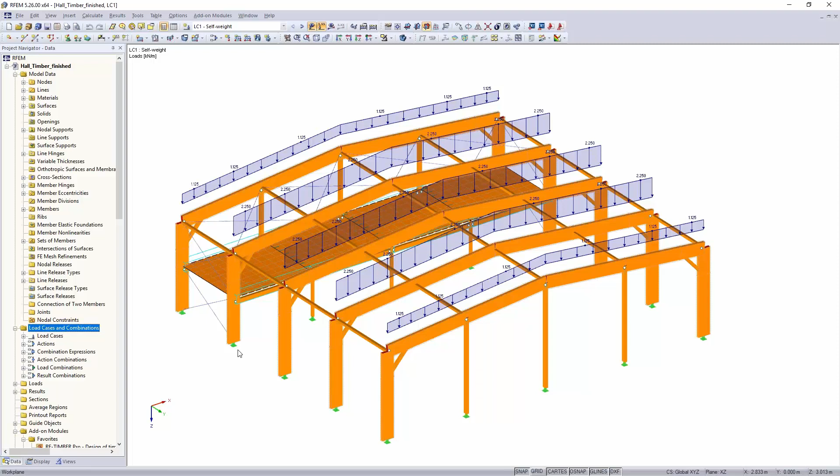Another question last week was what you can do in case you have a rafter with a roof overhang, a cantilever, and how to regard that, as Andreas modeled the creeping according to serviceability limit state with a creeping factor for service class 1. In such a case you would have a rafter with service class 2 on the outside and service class 1 on the inside.

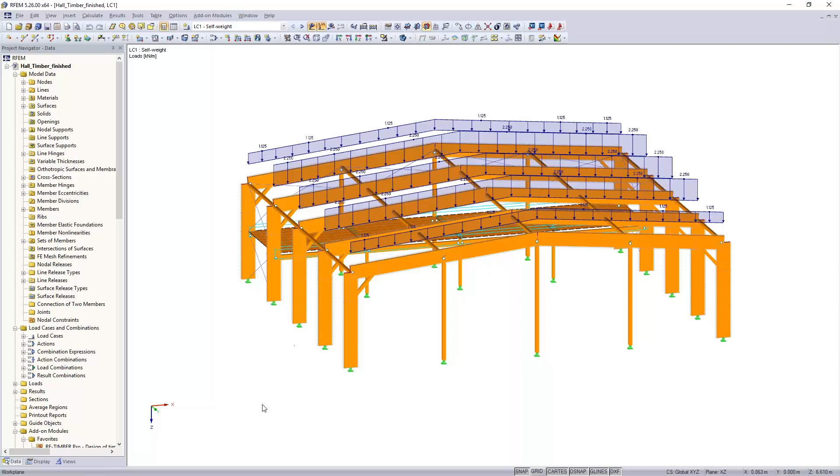I want to give you a short example of what you could do in such a case. On this truss, I will not add a cantilever, but I will show you what you can do in a highly nonlinear system. Therefore I would just focus on the beam or the truss in the middle.

So let's have a look at this, and I will take a look at the serviceability limit state in load combination 117. You can see that in order to regard the creeping, the software increased the load by a factor of 1.6. Andreas mentioned that all last week.

Now, how could you do that in case this was a highly nonlinear system? Because then increasing the load would not regard creeping correctly. That would work via copying this and reducing the stiffness. That's just one way how you could do it.

In general data, I will now switch off the automatic load combination, and I want to keep the current load combinations. Say OK, and now I can go in here and select load combination 117. Copy this load combination, and I will call it nonlinear.

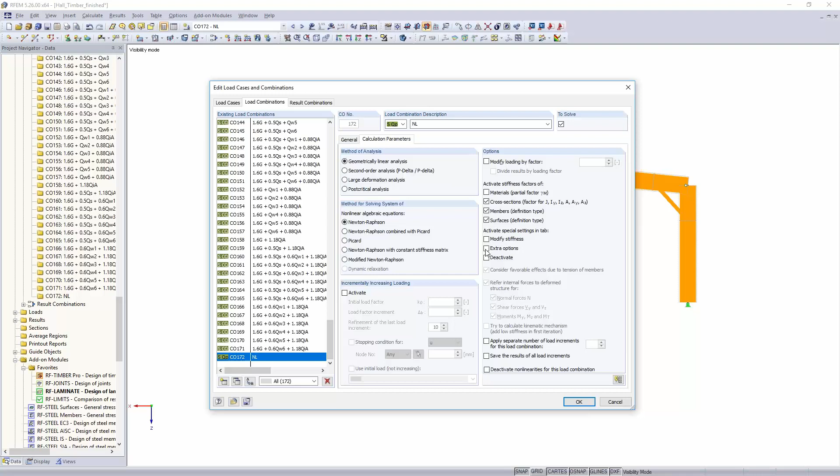Okay, and here I have the copied one. Go edit there, and first I have to reduce the increasing, so just keep it at the characteristic level. Then in calculation parameters — we're going to need these options later on also for ultimate limit state.

There's a check for modify stiffness, and if you activate that, you can reduce or increase the stiffness of hinges, materials, supports, for nearly everything that you have in the structure. For our case here, we will reduce it with the vice versa value of 1.6, so that's 0.625 for every stiffness.

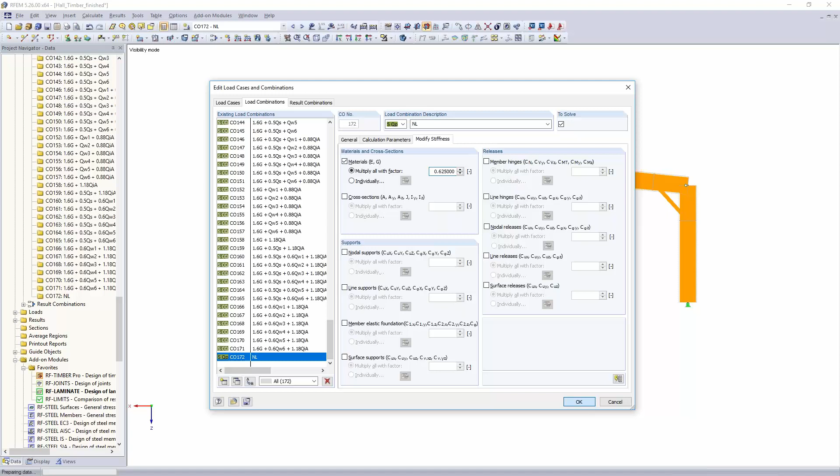Press OK, and now when we look at the load combinations, we want to see both. So at load combination 117, you see that you have a deformation of about 40.7 millimeters with the increased load, so with a factor of 1.6.

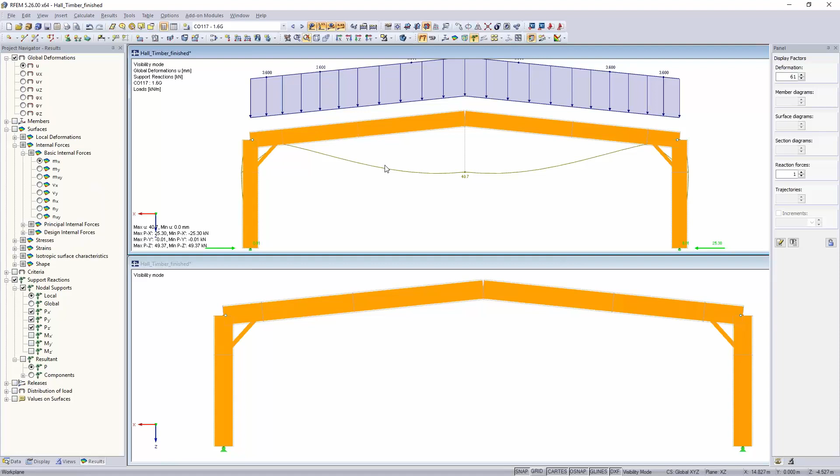So with this increased load, in this nonlinear combination we have the original characteristic value, and if we look for the deformation there, as this is now a linear system, you can really compare that very easily, and you see you have the same deformation just because we reduced the stiffness.

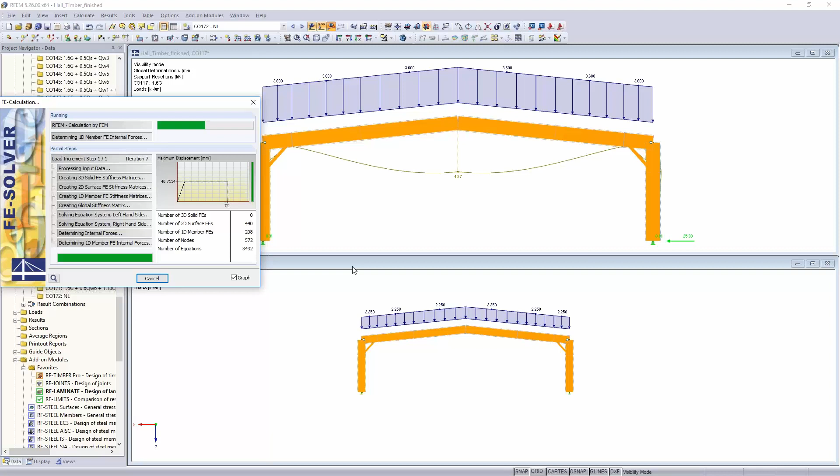This is a way how you could do that, in my opinion pretty easy, also for the case where you have cantilevers outside, because then the timber material on the outside you could reduce with the factor of 1.8, which is for service class 2, and on the inside you use 1.6. So it's just one way to do it. There are more options, but this is what I would recommend.

This was just due to the questions that we had last week, and as they were coming pretty often, I think it's worth showing to everyone.

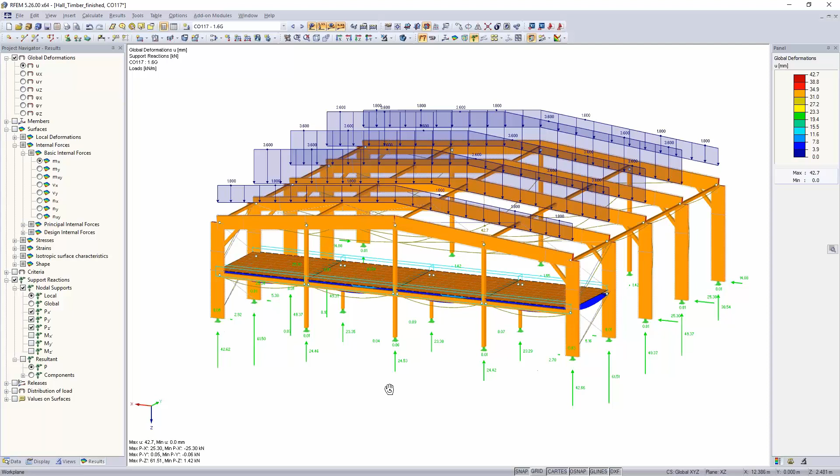Now we go into designing. Andreas already modeled here a CLT plate just for generating the stiffness that we would need for the design later on. But what he did not do, and what makes absolutely sense when you model the structure not to do, was to also generate the stiffness for the line hinges and the releases.

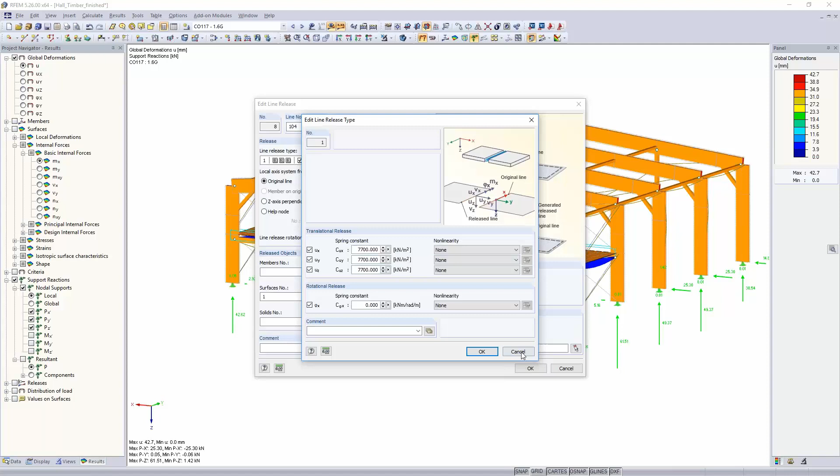So he generally introduced this stiffness here, but for the ultimate limit state you have to reduce this by a factor of 2 divided by 3, the slip modulus. For everybody who wants to know where it is written, it's in equation 2.1 in Eurocode 5, and you can do it similar to what I did before with the serviceability limit state.

Just go into edit load combinations here, and then you check on the ultimate limit state, every combination of the ultimate limit state, calculation parameters, and again switch on modify stiffness. In modify stiffness you say the line hinge and the line release we now also reduce by this factor according to equation 2.1 in Eurocode 5.

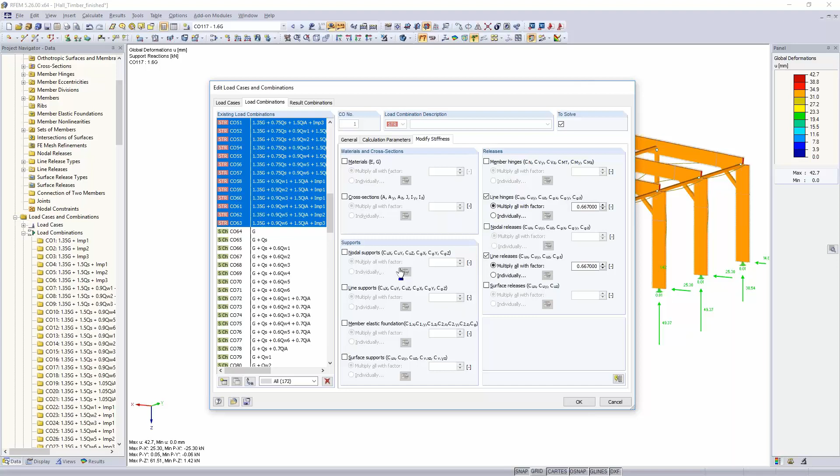So then this is done, and for SLS we are designing on characteristic level. Yes, that's what we want. So now you have generated the stiffness differently for SLS and ULS design, and then you can go to the add-on module laminate, which Andreas already showed you last week.

He used just the result combination here for the design. Usually, for the ultimate limit state in laminate, you should use load combinations because it's generating stiffness and it just makes more sense.

But of course this will take a long time, so for any design add-on I'm presenting today, I already calculated the design-giving combination and will just use that to keep the calculation time shorter and not spend hours watching the screen calculating. I think that's not so interesting for you. You all surely know that we can generate combinations and calculate them in not too long a time, but for the webinar we want to reduce it further.

So I found out that load combination 48 will be the relevant combination for me. For serviceability limit state, I will do that similarly. For the characteristic combination, I calculated combination 104, and I assigned it as characteristic. I will get to that point directly.

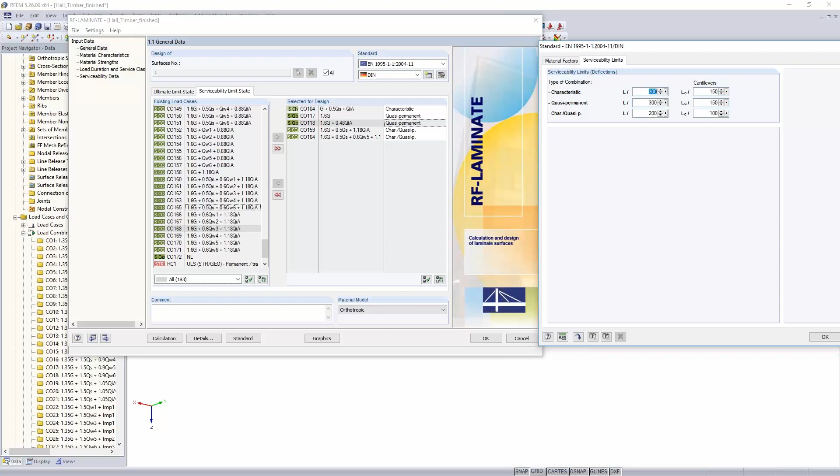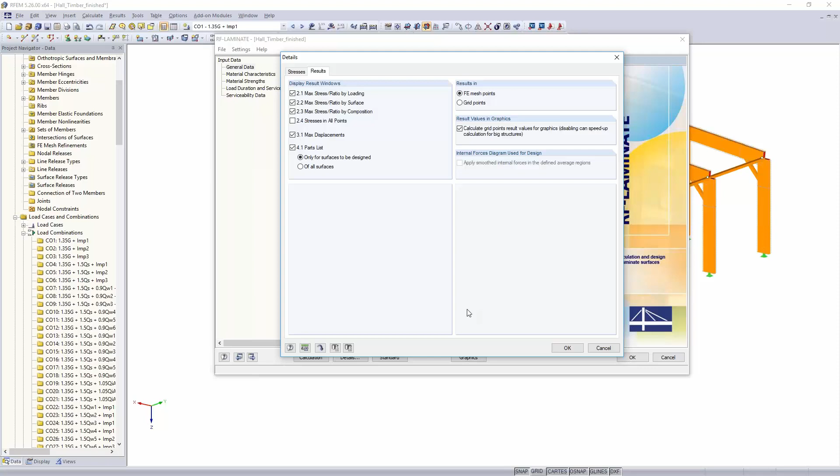Okay, the rest was well explained already. Let's say a small word on the detail dialog. The stresses verified in this add-on are predefined according to the German annex of Eurocode 5. In case you have a wall that you want to design, there are more checks you should activate, for wall loading behavior, but that's something more special. In the structure we are designing here today, we just have a plate or loaded plate in this case. Okay, material characteristics.

Andreas chose a plate from the producer KLH. Just to introduce all the other producers once again, we also have producers like Södra, Steiko, and so on. We try to keep the producer database current, but it makes sense to double check with the producer just in case they changed some setups or factors. In general, we try to implement every producer according to technical approval from the producer.

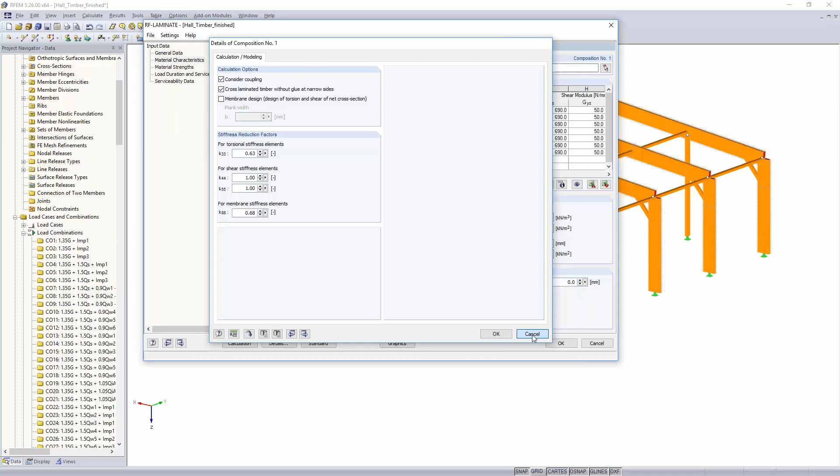Okay, so we choose the KLH. I'm not going to change that today. Here, edit details was also shown. KLH uses timber without glue at narrow sides, at least for the stiffness. That's what I said, in case you have a wall loading behavior, you should activate the membrane design here. All the factors are predefined according to technical approval, and this generates this stiffness here. Also the strength, it counts the same there as well. And load duration and service class is also assigned.

Once again, in case you have a rafter with a cantilever, also for the strengths, you must choose a different service class. That can be done quite easily here. We are completely in service class 1, but for the strengths you could choose different surfaces with different moisture class, that's no problem.

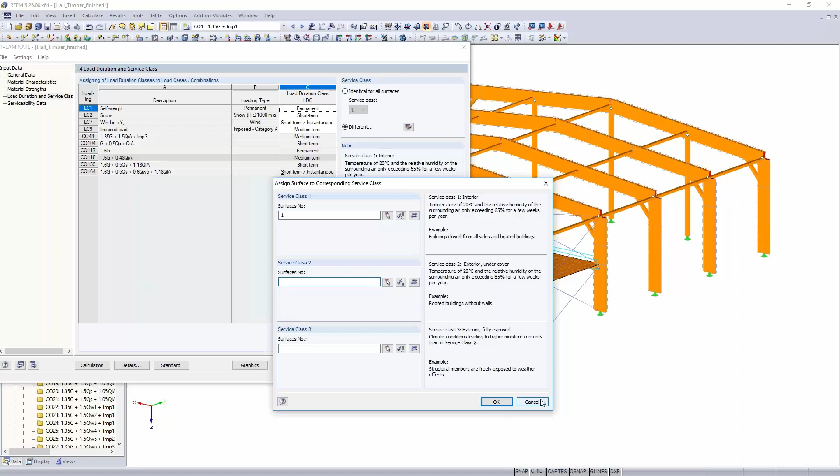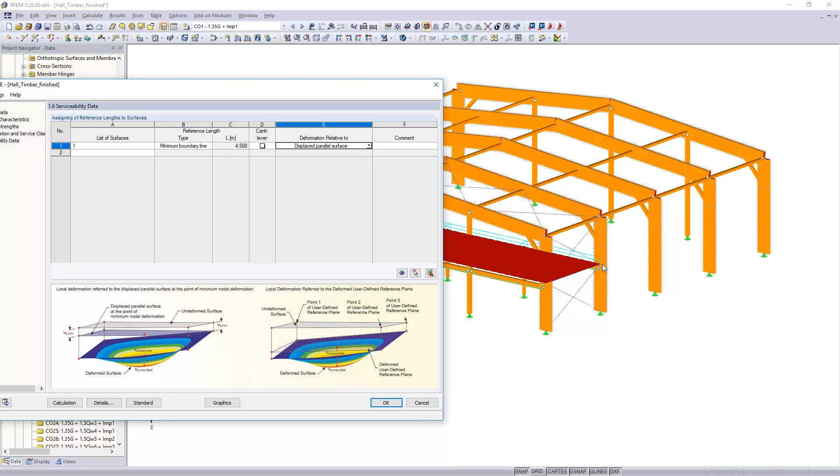All right, and then serviceability limit data. We just have this one surface here, and we want to verify it to the shorter length, from this point to this point, 4 meters 50 centimeters. We assign it to a displaced parallel surface. I hope these pictures describe it well. Undeformed is just the undeformed system, and displaced parallel surface means the whole structure can deform, and we only verify the deformation from one node to the other.

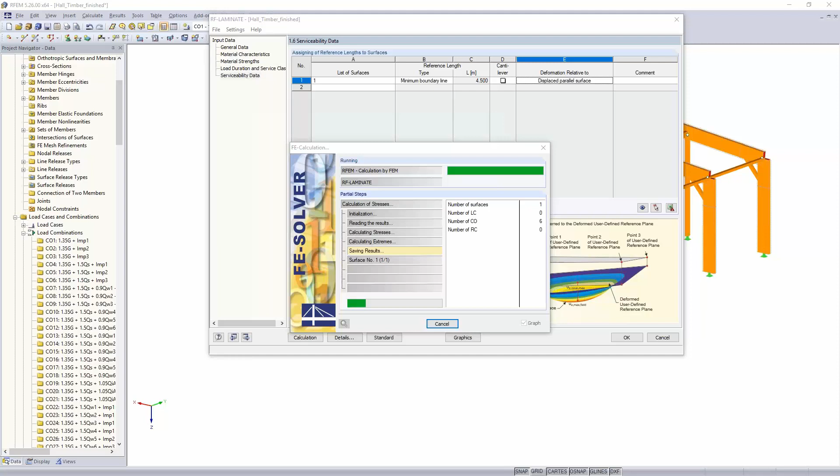All right, then we calculate it. That gives me the chance to look if there were any problems. Some audio was gone but it was just one person, so I hope that's okay. So for the stress design, we have now a ratio of 42% loading, and it is tension compression, which in this case comes also from bending and tension compression on the outer sides.

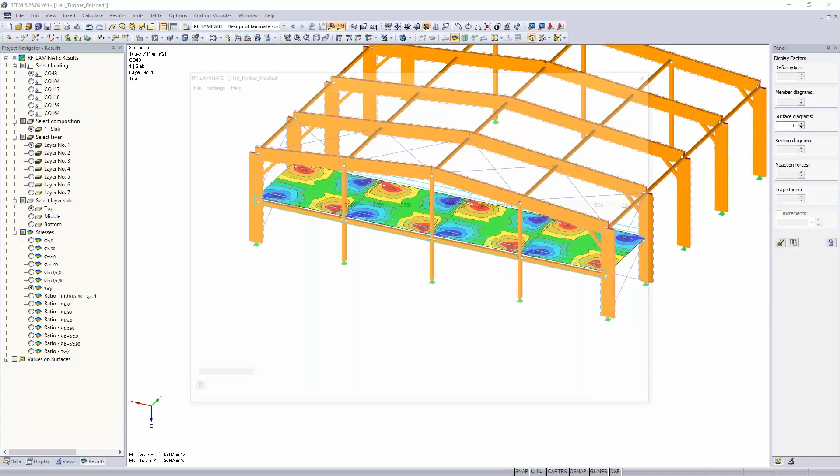If you go to the graphics, maybe we can switch off the rendering, yeah that helps. You see you have pretty high loading where the support in the middle is, and there are probably also shear problems on the edges of the surface, which makes sense. So 42% is not loaded that much here, but you also have to look at the deformation of the structure, and this is verified here. If you look here, for tension, for deformation, the loading is even higher, so we have a loading of 75%

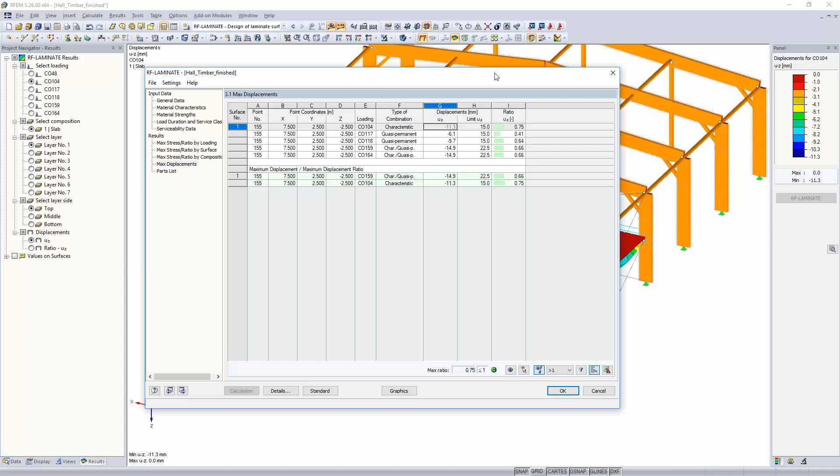in this case in the characteristic situation. And you should also not forget, maybe you would need deflection analysis as well, just in case this is required. Okay, so at all the design for the beam, or for the panel, is done here, and we could go to the design of the members.

Maybe one thing I forgot, it makes sometimes sense to get one of these pictures, for example, into the printout report. You can do that here directly in this column. Maybe when we get a nice shear, this one is probably something you would also want to add to the printout report as well, and maybe something outside the graphics. Yeah, this one, for example.

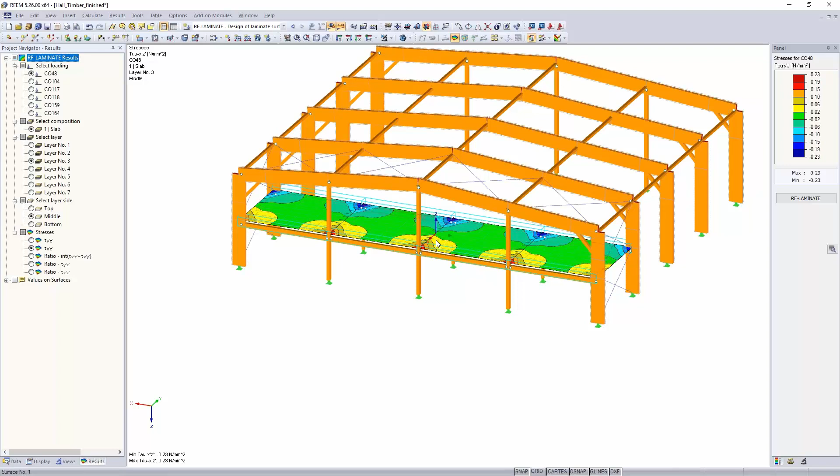So the design of the plate is done with this, but the connection on the edges of the plate and also on the outside of the plate needs to be done, and therefore we will just grab combination 48 in ultimate limit state.

48, there it is. And here in the results, down below, you have the option 'releases', and there you can see what normal force you have in the line hinge. Okay, that's not so interesting here, I think.

But for the plate lying on top of the beam, it's probably relevant, because this is the shear that's in between the plate and the member, and that's what you really need to connect. You see that there the value is not that low, and that's something you probably need to verify. So this gives you a good graphical overview.

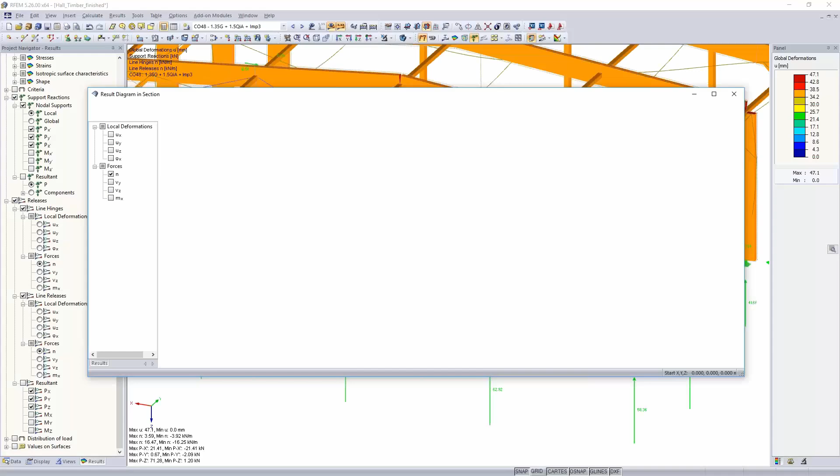Okay, so once you've done this, all the design of the plate with its connections is done. So you could say check to this, and now we go to the members. Therefore we will start the add-on Timber Pro.

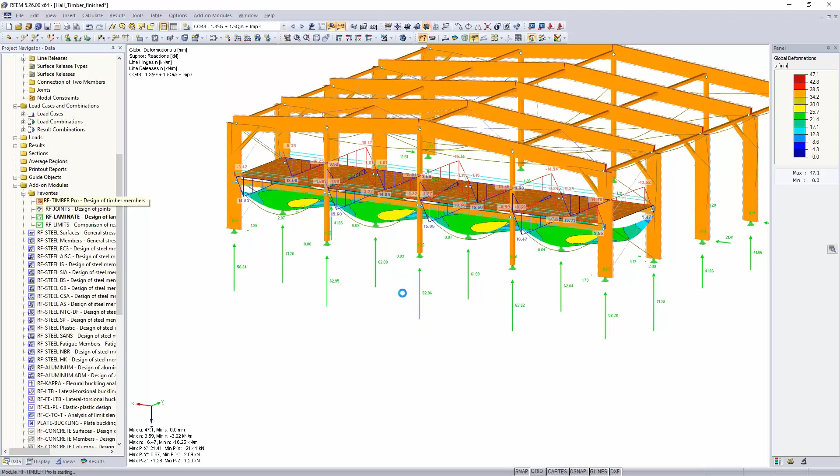And in here we have members and set of members. Set of members in our constellation here are important for the serviceability limit state. So for the deflection, I will only verify the set of members in the middle, so set of member 9 and set of member 6.

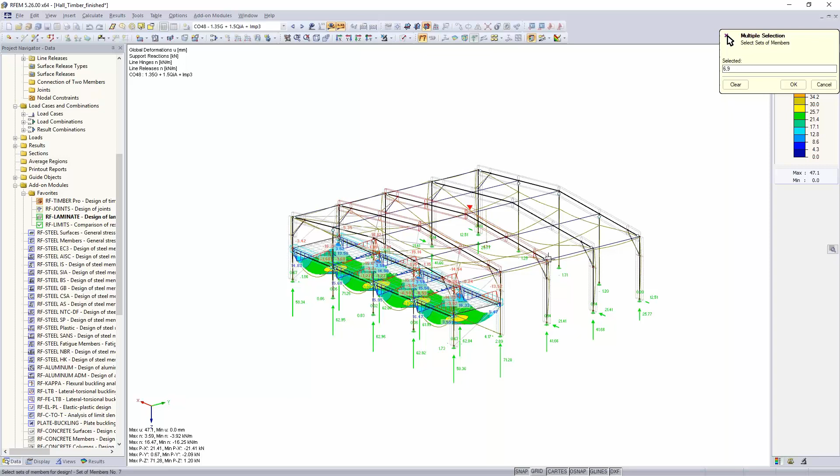Set of member is also important for stability, but in what we are doing here today, we are taking the deformation from the point where you see the mouse here and the mouse there, so we take the whole length and verify the deformation on this part. That's what we do here.

Once again, I will not verify the complete result combination, as this would be too time consuming for the webinar, and I will use combination 38 and 44 just to have two, and I will do the same for serviceability limit state with combination 72.

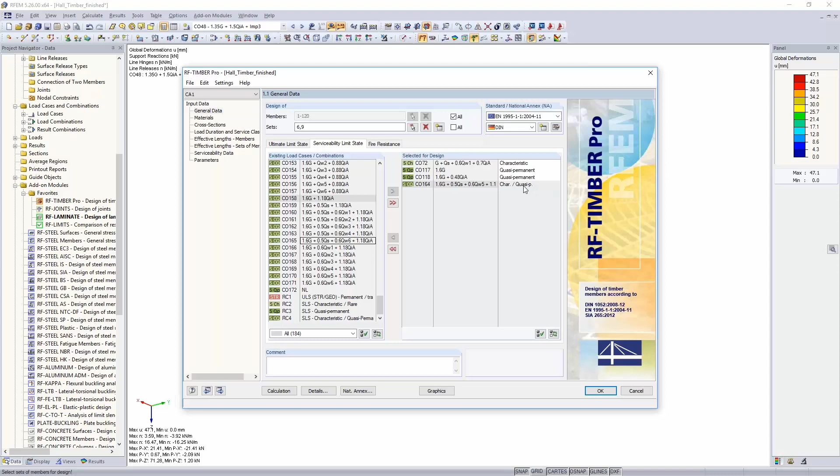For the characteristic level, once again, for quasi-permanent and characteristic, I can choose both, as there are only 2 generated, and for the characteristic quasi-permanent, this one now, I will use combination 164. Okay, once again, it's similar to what we had in the laminate add-on.

It's automatically designed. If you want to do a simplified vibration design, you could do that here as well. But for the members, I don't see that too problematic here. Maybe for the CLT, as I said, that would be something I would maybe do or add, but we're not going to do that today.

Fire resistance is possible with Timber Pro. It is also possible with the laminate add-on, but it requires more effort. Maybe Gerhard or I will send you an FAQ where we answer that. So it's possible, but in laminate, as laminate generates stiffness, it is just more effort to do.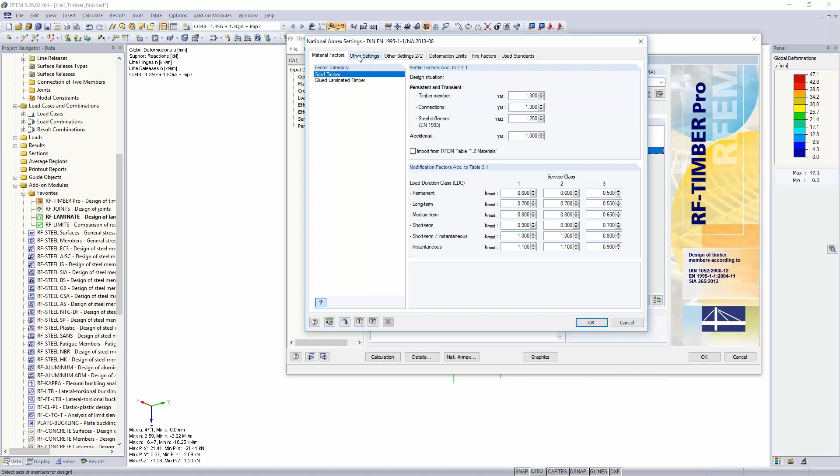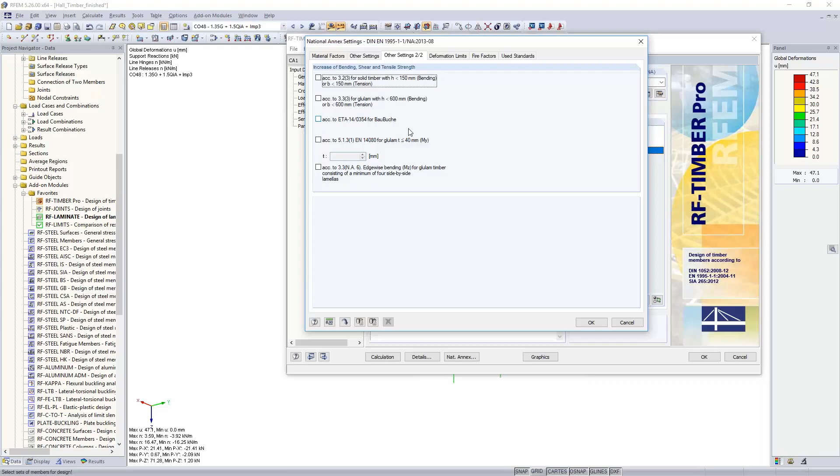Nevertheless, it makes sense to take a look at the detail dialog of the National Annex, because you not only can define deformation limits, but you can also add all the other factors, for example for K-crack, for shear verification. If, for example, you want to calculate LVL from the producer Baubuche and so on, you could also activate that here in the detail dialog.

The rest is not so important. Load duration, service class, it's the same dialog as what we had in the laminate add-on. One thing I forgot when we started, in this case we defined imperfections and calculated the ultimate limit state according to second order theory. Therefore buckling does not need to be verified, and lateral torsional buckling—I have a pretty stiff sheeting and I will verify that separately, so I can switch off the whole check for stability.

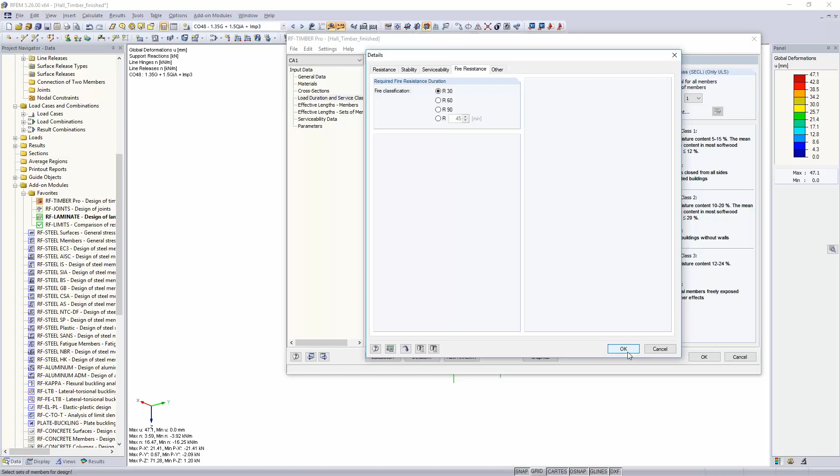Serviceability, that's the same as what we had in laminate, with deformed and undeformed system; fire resistance we do not do here. Okay, that's this. Serviceability data, okay, we say set of members—I remembered what we did there: member 6 and member 9, the ones in the middle, and I'm using the full length.

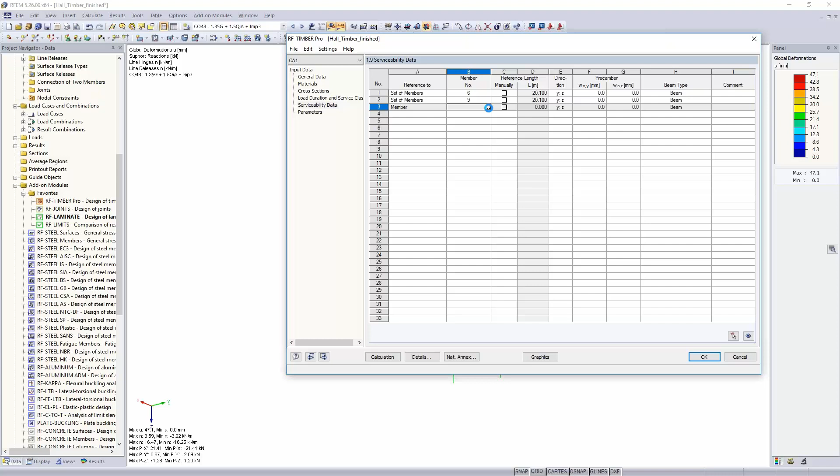And maybe also the members underneath the CLT should be verified for deformations. I will now only take the one here inside. Maybe I just don't care about the ones on the outside, and verify them. All right.

Parameters is shear force reduction and also cutouts, which we do not have in this situation. So we could start the deformation calculation of all the combinations that we assigned.

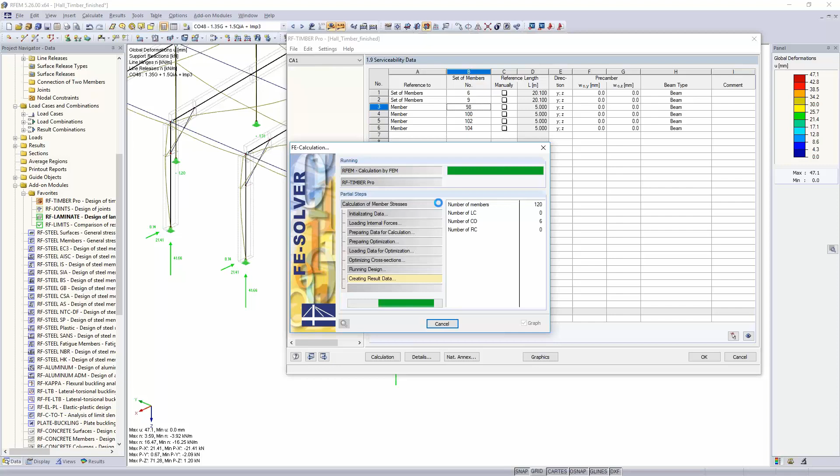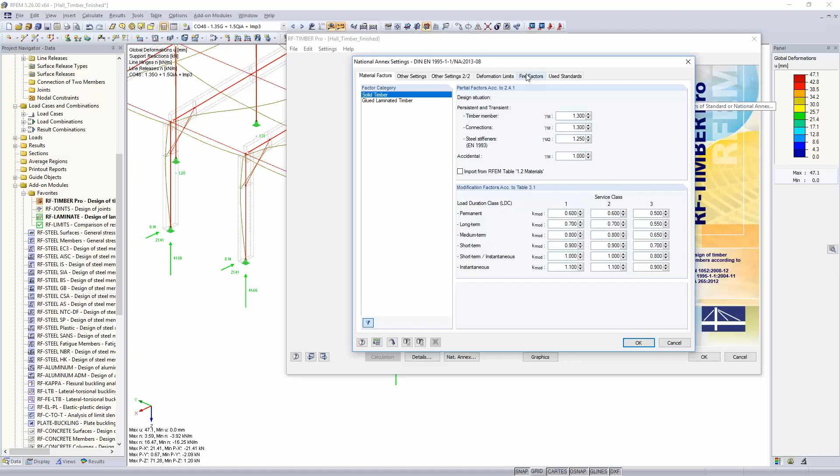There was a question about fire resistance, so let me quickly introduce that a bit more. I will not verify it today, but just to keep you informed: in order to verify fire resistance, you must create an extraordinary combination in load cases and combinations. Then we reduce the section, all the sections inside, with the so-called burning rate. According to this burning rate, we do all the verifications for the ultimate limit state again with the reduced section. In general it's not so fancy to show, as it is actually the same as what we have here in ultimate limit state. Hope that explains it.

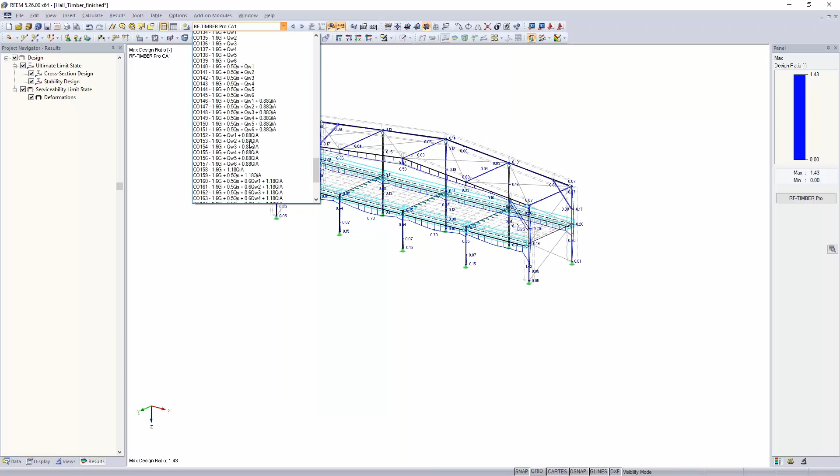Maybe we look for the combination 38, where we calculated that. And then the inner forces there and the torsional moment, which is the critical point here. In members, torsional moment, and maybe we switch off the releases. So you see that we have here a torsional moment of nearly 4 kilonewton meter on the edges.

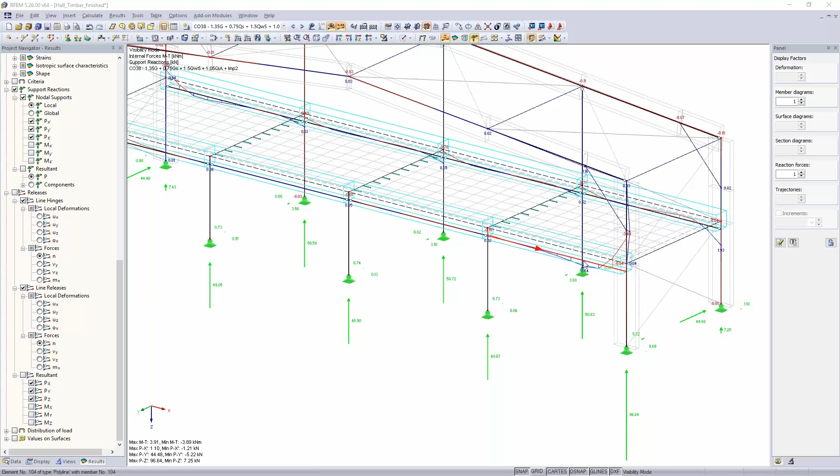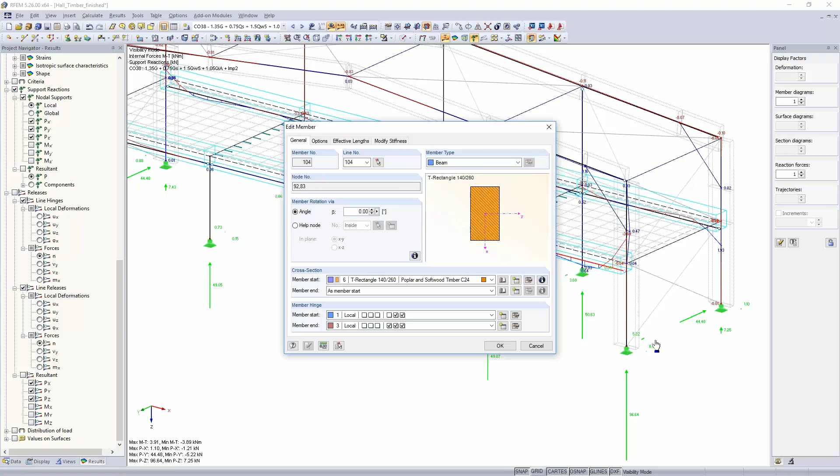It's clear we forgot to put the degree of freedom here. It's only the degree of freedom for the moment in Y and Z direction, but not for torsion. So the phi x on these edges needs to also be given the degree of freedom of 0, which is always the case in timber design. Yes, that requires that I delete the results, because a moment of 4 kilonewton meter you would never, or hardly can, be transferred with any kind of connection type that we have there.

And we will do actually the same here on the start - member start, this one as well, so the same hinge there. Now when we calculate combination 38 again and look for the torsional moments that we have now, you see that we really decreased the torsional moment by a high amount.

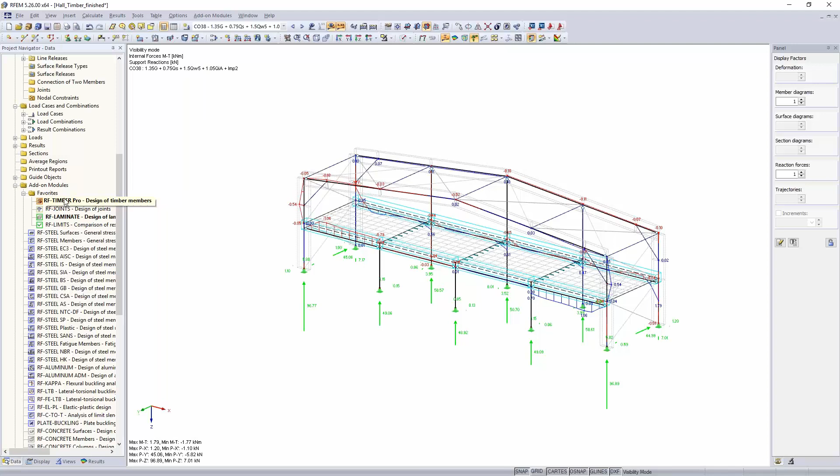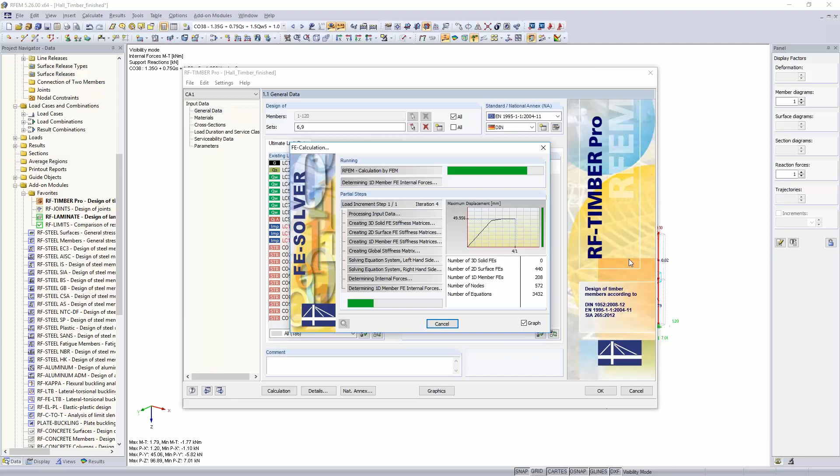Now when we go back to the design in the add-on, we keep the serviceability limit state. It maybe doesn't make so much sense here, as we saw that serviceability limit state was not really a problem, but maybe we want to see the deformation in the longer set of member. I want to show you also the graphical presentation of that. Now you see we do not have any problem from the ultimate limit state, and the design-giving case is now serviceability. All verifications are listed here, and you can recalculate everything that's done by the add-on.

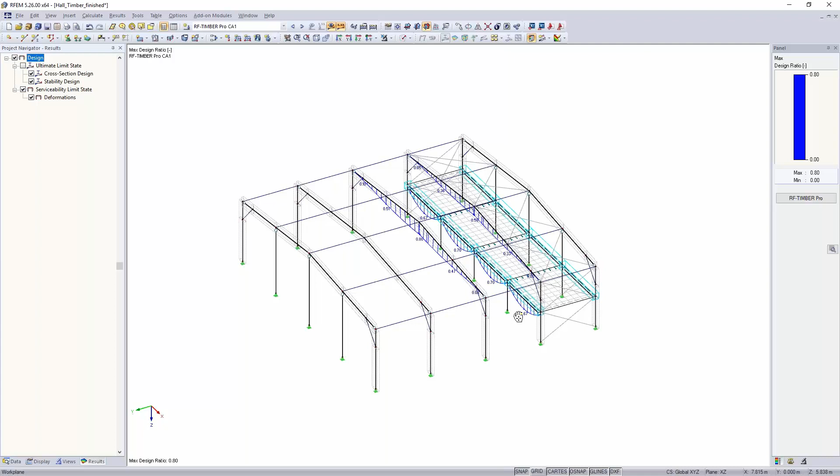If we go switch to graphics and to the whole structure, we switch off ULS, and you see that the longer beam in the middle was actually, as I expected, design-giving with a loading of 80%. The smaller ones are also loaded pretty high, the beams that are underneath the CLT plate.

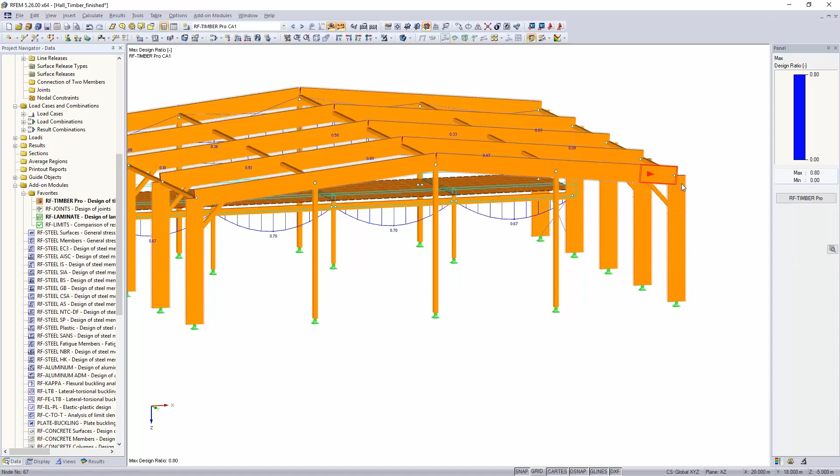That would be the design of the structure, and we can now calculate the connections. I want to concentrate on the connections here at the outer edge of the hall, and also, if we have time left, the connections between the column here and the beam that's spanning from this point to this point. But first I want to design the edges, so I will start the add-on RF-JOINTS.

So that's a little bit different to what I showed you in the Timber Pro and Laminate add-ons, because in this add-on we have the possibility to design steel and timber. These are all different add-ons. So we are concentrating today on timber, and in this add-on you can still separate between steel-to-timber connection and timber-to-timber connection.

Steel-to-timber connection is every indirect connection where you have a steel plate slotted into your structure, and timber connection is a connection between main and secondary truss or load bearing. So we will concentrate for this corner here on steel-to-timber connection.

You can calculate dowels, bolts, nails, and screws. We will design dowels. You have the option to design different joint types. Our joint type will be without continuous member, because we will just have two members connected here. You can choose the cutting main area and how they are connected. You can also choose the standards with all the national annexes.

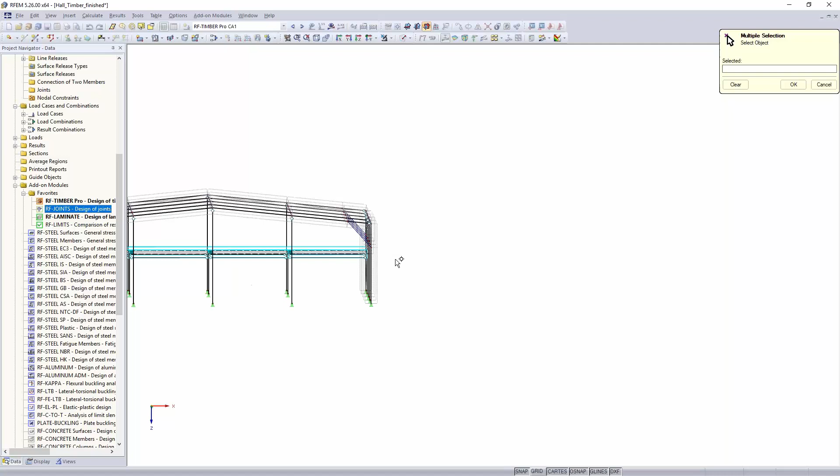You can check the contact of the members and also calculate groups of dowels. All right, then we go into the structure, and therefore we will select - let me switch off the rendering again and also the results. And so we will calculate all the corners here with one check, and also the ones from the other side.

All right, so now I get a lot of alerts, which is clear because we have invalid members, because steel rods cannot be designed with a steel plate, and also the secondary beams here do not make too much sense. So we will just keep the connected member and the main member, and set all the other members as inactive.

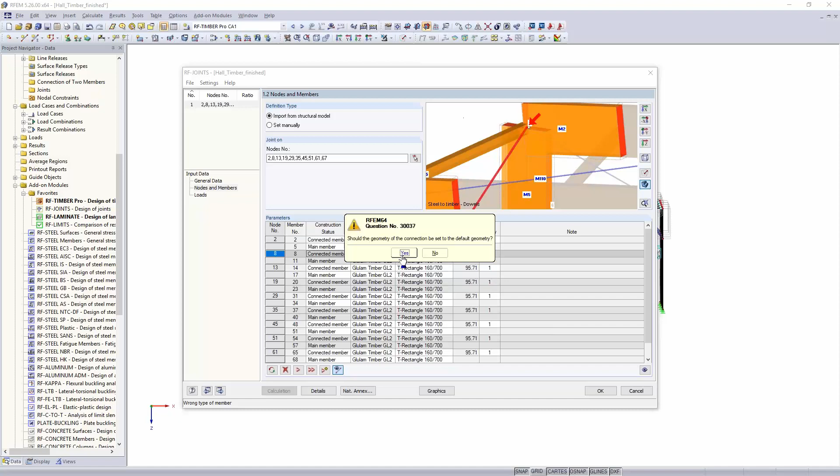So this one inactive and this one as well. And then it asked me, okay, shall all the other connections work similar to this? Yes, that's what I want. And do you want to have default geometry? No, I do not want that.

Okay, now all these nodes have the information that they should be connected here. Once again, I will just assign one ultimate limit state combination, so 2, 13 and 19. Load duration and service class I will just skip - I don't think that's too important.

And now we are in the dialog of the geometry, and that's now the important dialog. Here you can first define the shape of the steel plate. User means that it's just assigning the steel plate on the outside edges of your structure. You could also have it rectangle.

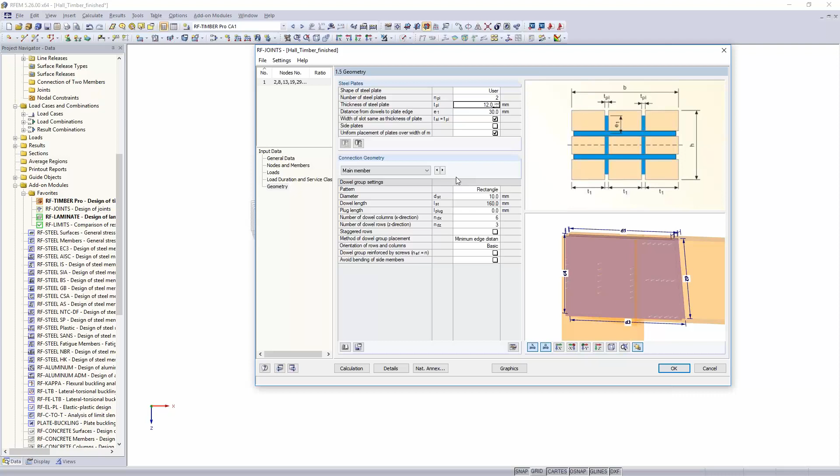I don't think that will - here you see. So then it will be a rectangle one, and it could also be convex. I think user for most constellations is the one that you would want to have. You can define up to 5 slotted steel plates. For our first design approach, I will assign 2 steel plates. I will give it a thickness of 14 millimeters, and everything else I will leave as it is.

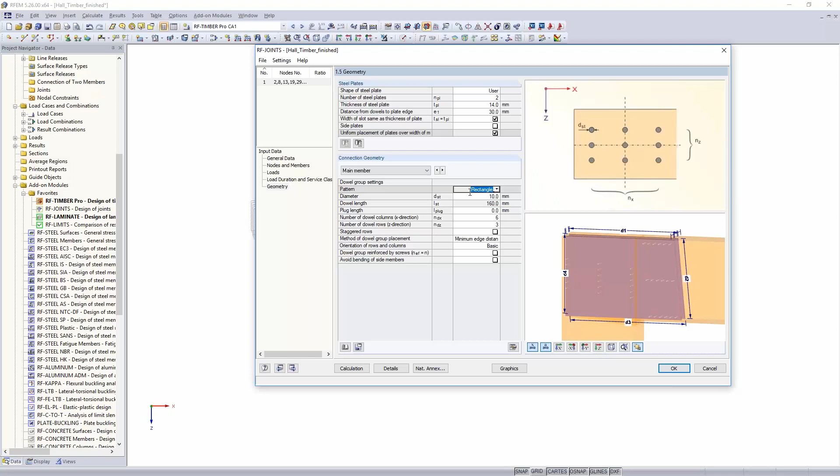We can also define side plates, but I don't want to do that for dowels - it's probably not so sensible. For nails and screws it makes maybe more sense. We can choose a pattern, rectangle or round/circle. And here we define the diameter of the dowels. I keep them similar as the plate with 14 millimeters.

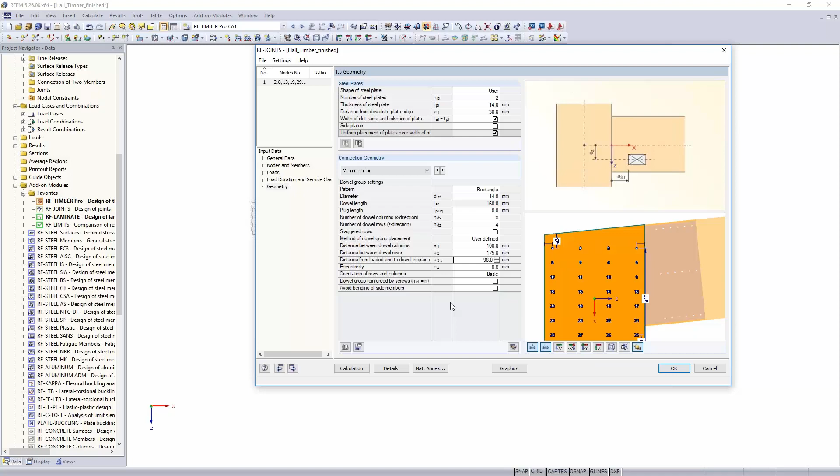And I say I want 8 dowels in X direction and 4 in Z direction, and maybe also want a more sensible limit distancing with user-defined limits. So for the main member, I will choose A1 of 100 millimeters and A2 of 175, and A3T of 140.

I have to do the same for the connected member, so that's 14, so 8, 4. And also here I make a user-defined distancing with 105. I could save all this group to a library and get it back again, so that's also possible - I do not have to define that every time again and again.

Now talking and inputting is too much. So A2 I define a distance of 160 and A3T a distance of 130. I could also reinforce with screws, but I want to look if this is really necessary here. And when I have bolts outside, I can avoid bending of side members. So these are more options that I have.

And now when I calculate it - what did I choose now? 19 and 13, sorry.

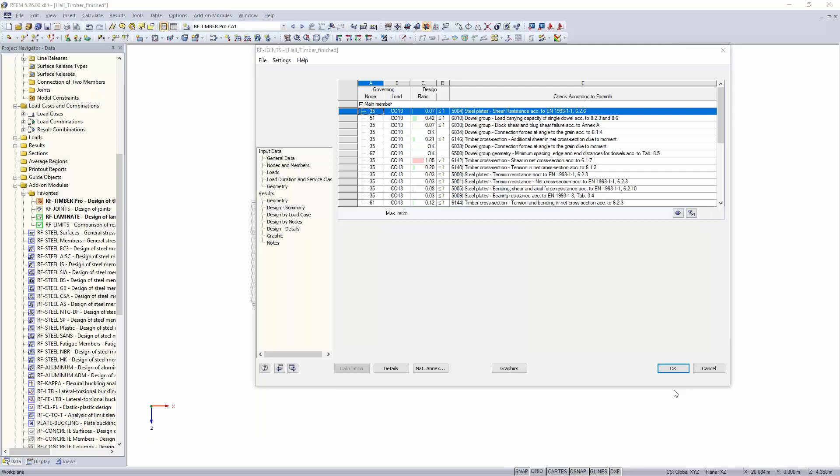So now we see that it's overloaded by 5%, but the steel plate is loaded nearly nothing, only 7%. The dowels themselves are loaded by 42%, so that's also not that much. But in the verification of the dowels, you can see that we are verifying the force in each dowel, so we really get the force and also the deformation in each dowel. And you see that we have an overloading by shear of the timber.

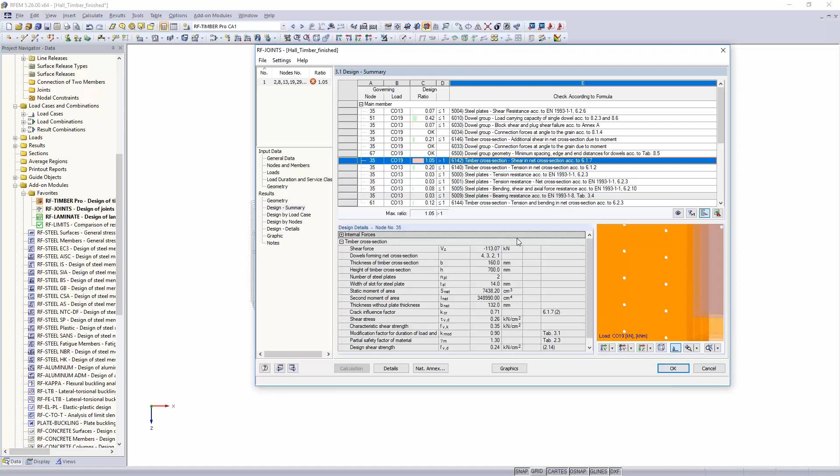So the timber is overloaded. Now what can you do when you have an overloading of the timber?

According to Eurocode, you should calculate with regard to slip in the connection. Right now, when you look outside the structure, we can do that in here. There is still this connection assigned, okay, for sure, but it is still this moment hinge with a value of 0, and this beam or member is connected to the corner point.

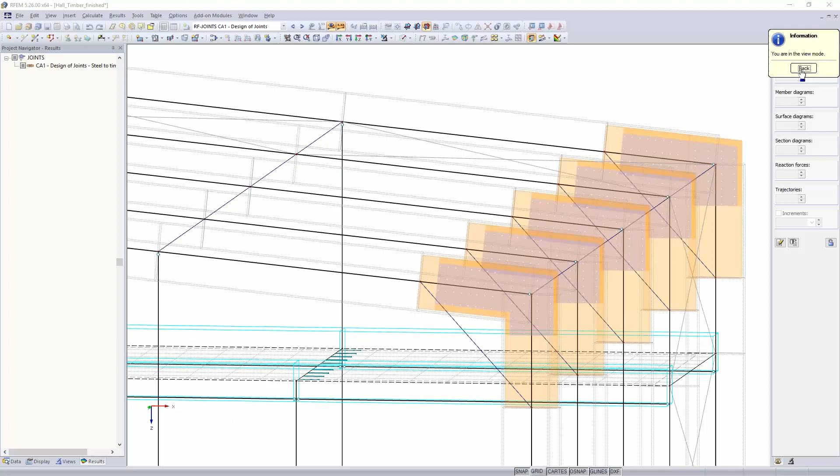But if you look for that more detailed, you would say that it's probably connected via all the dowels, and here is actually no connection. So the static system that we are designing in here is actually wrong. And now this add-on gives you the possibility to generate the member eccentricity and also generate the connection model.

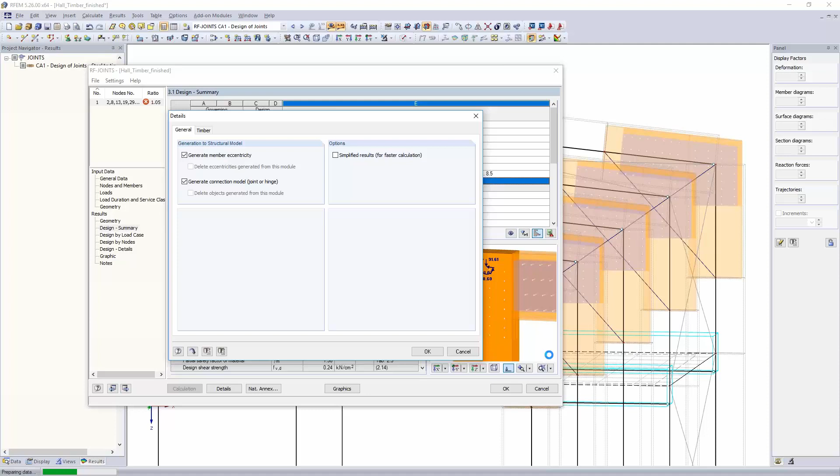Now if you activate that, it asks you that it will delete all the elements and will also create a new static system. So if you look at the back of the screen right now, you see that now that I pressed OK, it overrides every element that I have activated, and it kind of loosens.

I have to go outside, and maybe we will just look for the truss in the middle again, just like we did at the start. So if you look at combination 13, I think that was the design giving one. 13, and let it calculate.

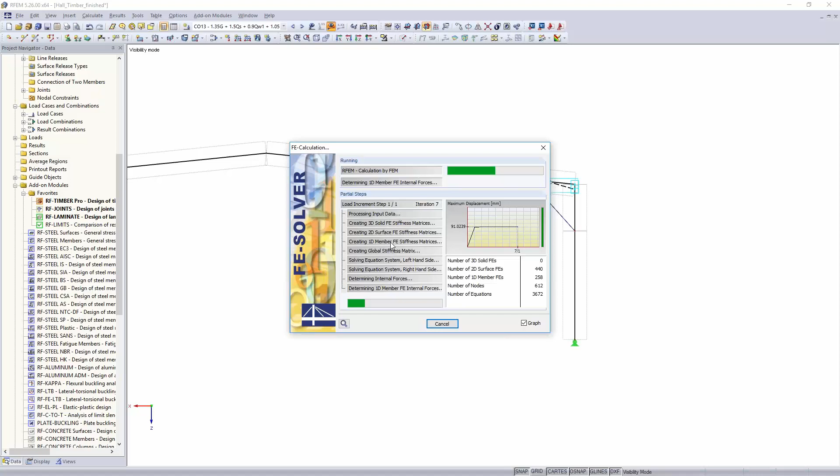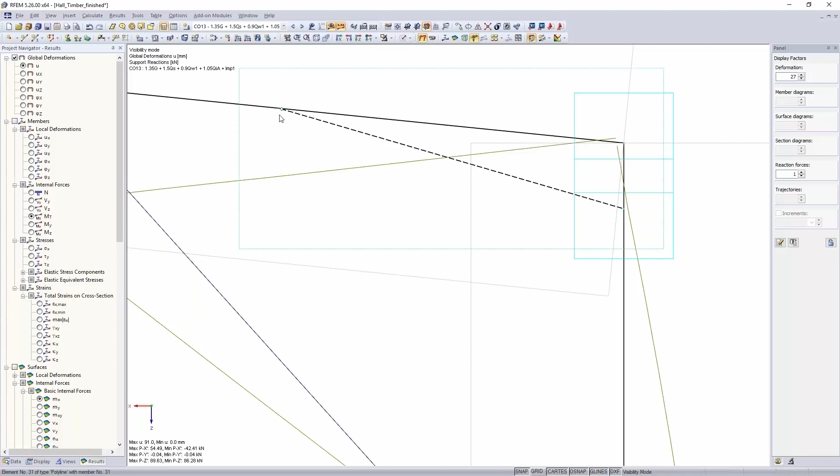The joint is not so relevant here, but when you look for the deformation, I think that's probably the most impressive thing to see. You see that there is no connection anymore, as the connection goes now from this point to this point. So that's the intelligence behind it, according to Eurocode 5.

So with this information, we go back to the design tool. We saw that we had a pretty low loading of the steel plate. So to me, even with now a higher loading of the connection, because usually when you calculate with this slip in the connection, you have a lower loading of the timber but a higher loading of the connections. That's what you really will find out. But the steel plate was only loaded 7%, so 2 plates probably make no sense here.

And therefore I changed that to 1 plate because I think it's still enough. But I probably have to increase the diameter of the dowels. So I keep that now with 18 millimeter, and I do the same for the main member just to have it similar. Everything else I leave as it was and calculate again.

Now it asks me again, okay, that means I have to change the stiffness because I changed the diameter, and the stiffness exported right now was according to a diameter of 14 millimeter.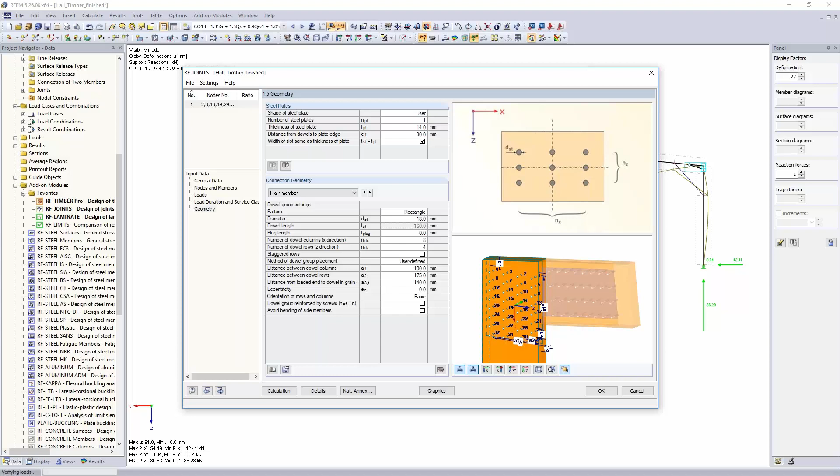And calculate that again, and I hope, I cross my fingers, that now the loading or overloading of the timber is not a problem anymore, hopefully. But I expect problems in the connection design there. So you see now we have an overloading of 12%. Damn, that's actually not what I wanted, but let's have a deeper look into it.

So the dowels are now loaded nearly 50% more. Steel plates are also loaded pretty much more, but the timber is now not a problem anymore — now the connection is a problem.

Okay, what else can you do if you do not want to change the geometry? The main member was actually okay. Maybe the connected member is something you could try to improve, and that's what I said when I started the add-on — you could reinforce it by screws, for example.

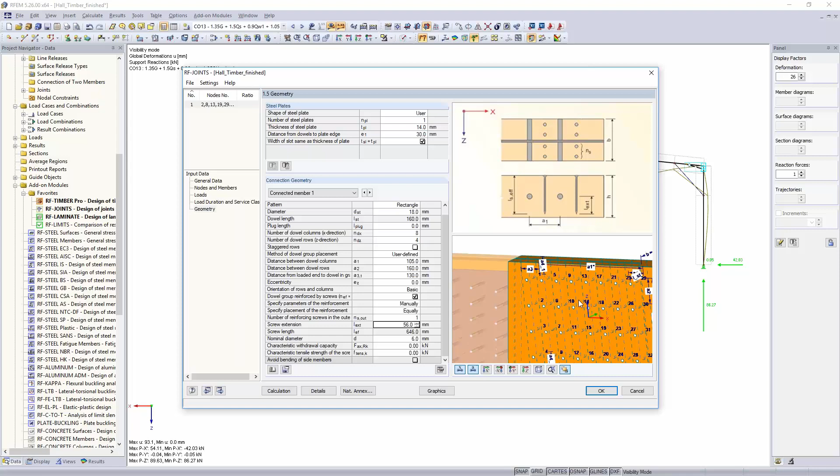So if you want to do that, maybe I define it manually. I want to increase the length of the screws to near the outside of the beam. I can just extend it by 10 millimeter, and if I'm choosing a screw from Würth according to their technical approval, I can assign a strength of 12.5 and maybe also say, okay, I avoid the bending of side members. That would actually require also some screws on the outside or a bolt, but just for giving it a try, and a bolt is also possible here as well.

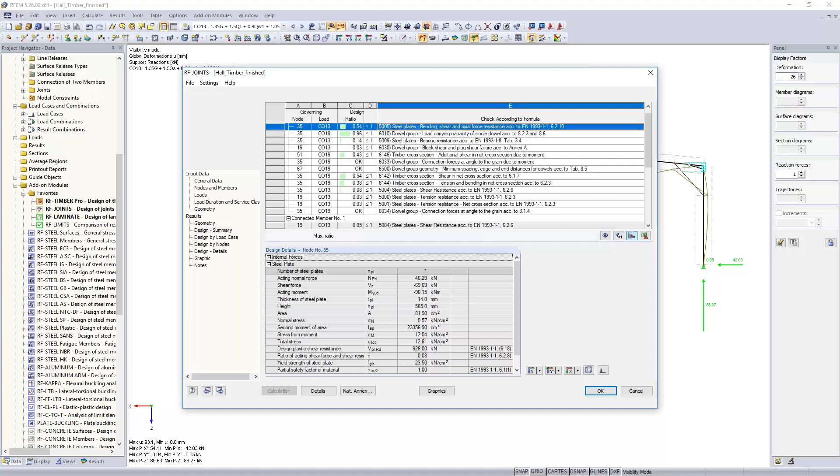So I saw there was a question about IFC and BIM, building information modeling. That's not part of the webinar today. Probably Andreas will make webinars with this pretty soon, or we already have webinars he can send you.

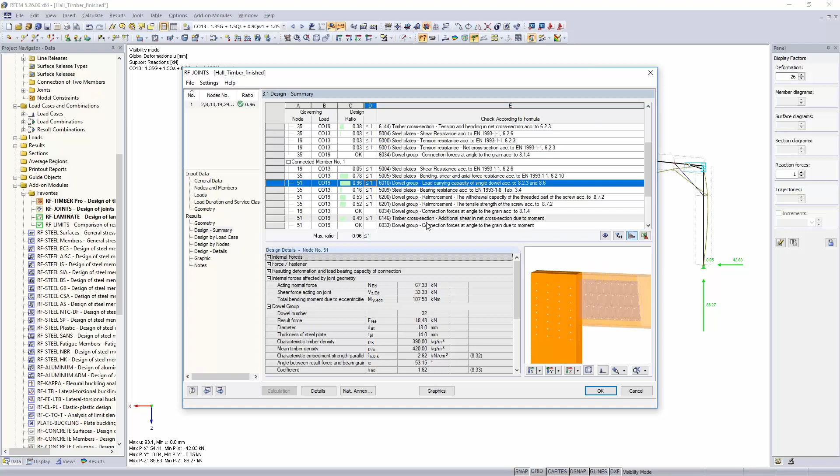Okay, got the result. We have now success. Everything's below 1. We have the green hook here. So we have now only 96% loading of the dowel group. That's what we want. Here in geometry, you can see the stiffness, similar to what I did with the connections in the laminate in the CLT plate. It's similar or different for SLS and ULS situations. It's the same equation, 2.1.

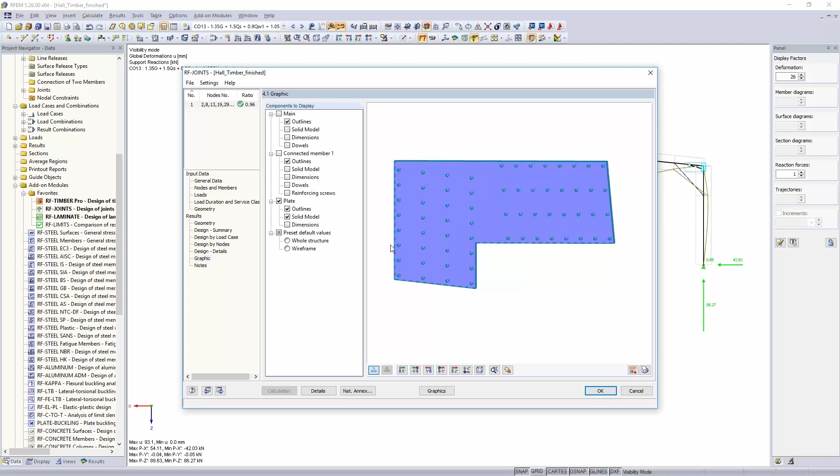According to Eurocode 5, and exports that for every load combination differently. You can also have a DXF or a plot you can export, maybe when you just want to export the plate to something. You can also export to your CNC and create a shop drawing of it as well. Okay, yes, we can check connections also for fire. I said it when I introduced it, but with a simplified approach.

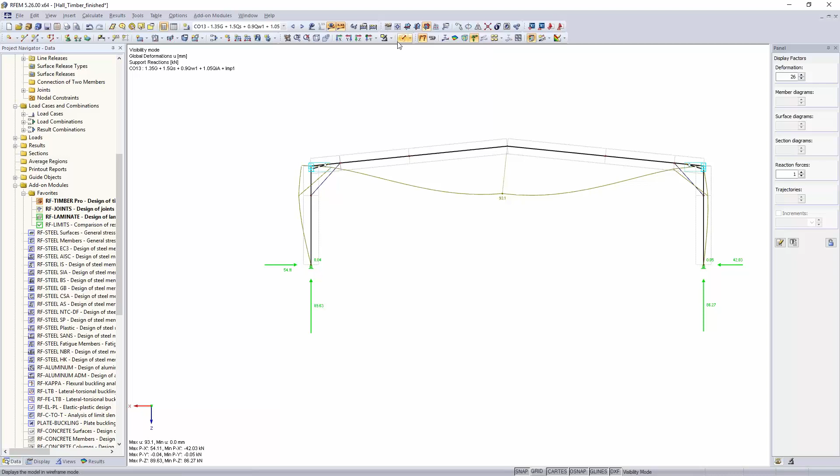Okay, we have a few minutes left, and I can take the chance to show you now, maybe not the connection or the foundation design as this was a question here, but to show you where you can do it, because I wanted to connect the beams here from where the CLT panel plates are supported onto the column, and also the footings or the foundations of the columns. Just let me look what combinations I want to verify. It's combination 48. This here is the same as what we had. I do not get into details of that anymore.

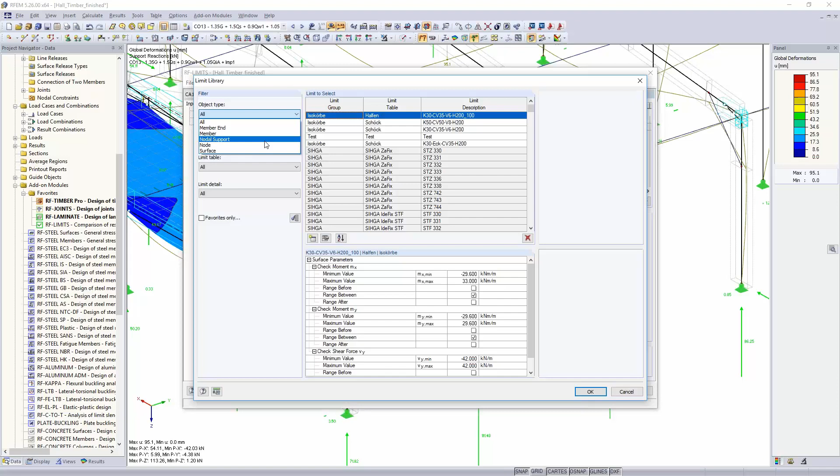And now if you go into limit description in here, you see that this actually is a pretty big database where you can verify everything that has a limit strength. So we have here different object types, member type, members, nodal supports. That would actually be the thing you would need for your foundation. So you could also say, okay, I'm verifying. You see it already here that combination 30 would probably not be enough for this footing right here now. And we have several producers in here from SIHGA, Sherpa, and so on.

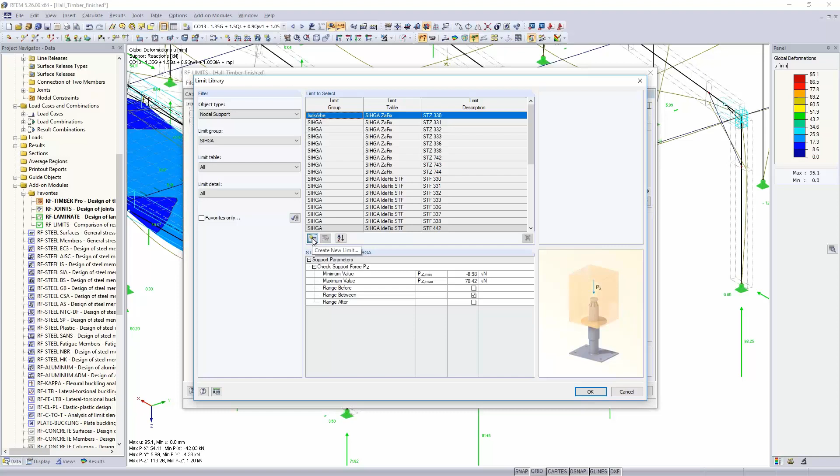And you can also create your own new limits in here, just whatever you want. And you can also verify the same point for member end with joist hangers and so on. We also have several producers implemented: Wood, Simpson, Strong Tie, and so on. Actually, I want to choose the SIHGA connector now today, but there are others as well. And you see we can check the section dimensions and also the load.

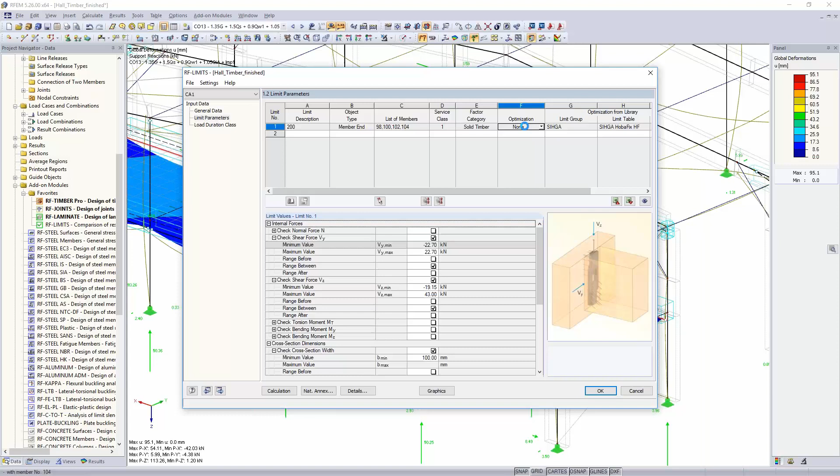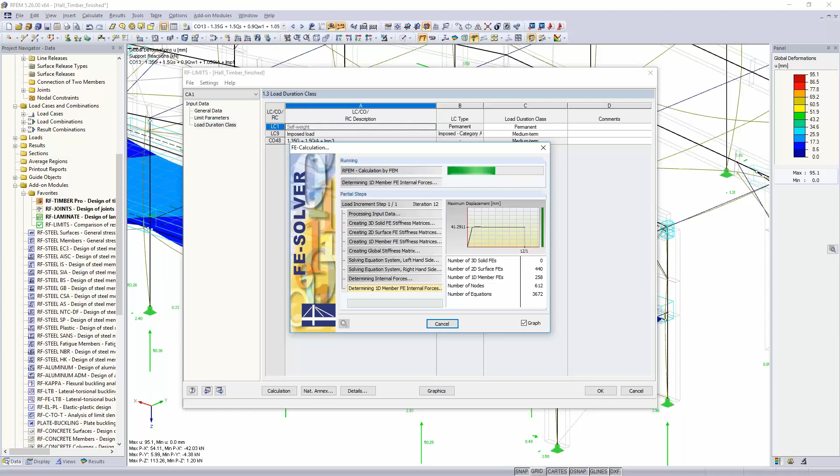Here we can define the list of members. I once again will just take the inner ones, or the members that are on the inside of the structure, start and end member, say OK, and say OK, service class, and service class in this case is 1. Factor category, I can use solid timber. I can optimize this according to the row or the group and so on. Load duration class, probably there's not really much to say. We've had that all. Medium term is the one that's chosen here for the combination 48, and then verify this as well.

All right. So, and you see in here, as I said, this is the database. It will check if the section is correct, or if it's possible to put this connection that we've chosen here on this section that we have, and also if all the minimum and maximum values are verified. So this is it, but it's probably quite handy to check a complete structure pretty quick. And you can, as I said, you can do the same for the foundations, but I'm not going to do that today.